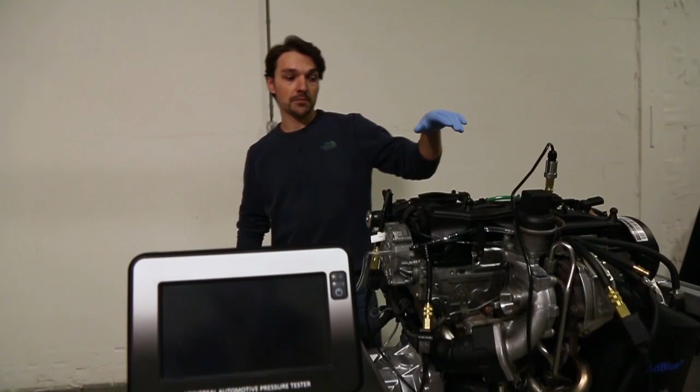All right, everybody, hello. Today we're going to talk about the pressure tester, and more especially how to use it on an engine. In this case, for display purpose, we made this engine rig. And today I'm going to show you how to use the products on this engine rig.

I would like to remind you to have a look at the first video we made because this is the best introduction to the tool. Today, I'm not going to show each and every adapter in the kit. I'm only going to show you how to use it on the engine rig.

I would also like to mention the fact that you have two sensors included in the kit, while on the engine you will see that there are many sensors already mounted. This is only for display purpose. It's much easier to have them already mounted on the engine than having to connect and disconnect everything all the time. And that's it. Let's go to the tests.

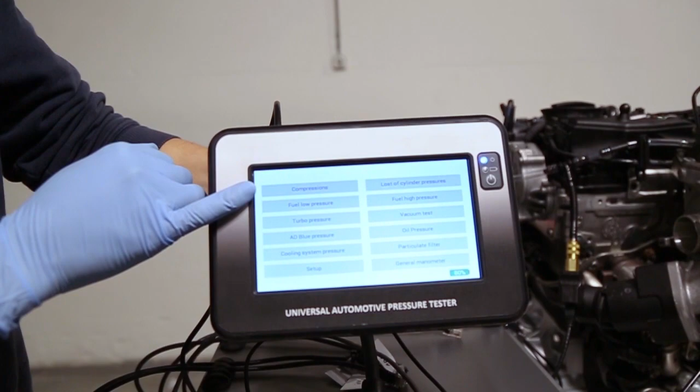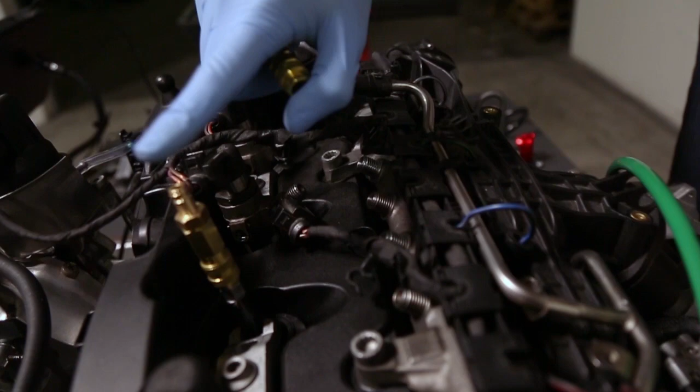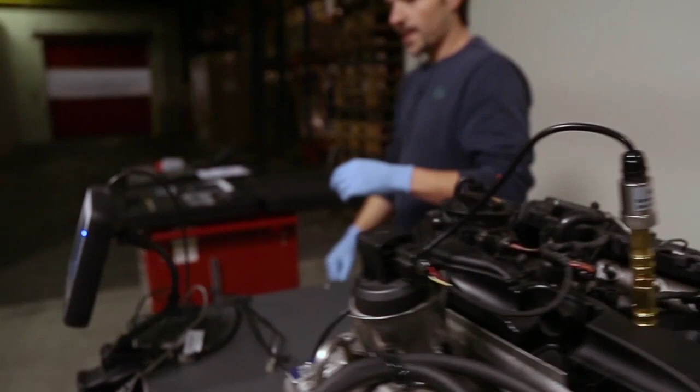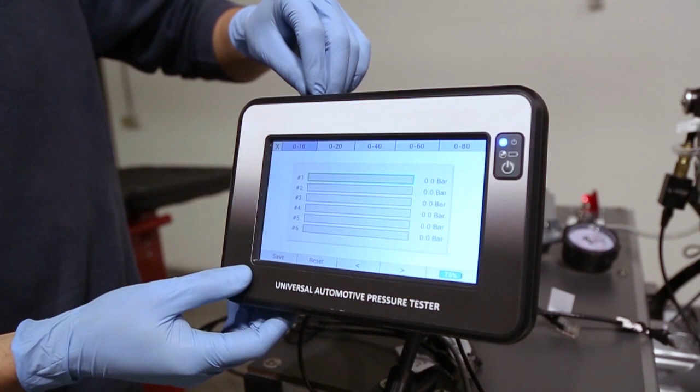Okay, the first test we are going to make is the compression test. To make the compression test, you have to put the false injector here. So we already set it. It's sitting in place of one of the injectors on the cylinder on which you want to take the measurement, of course. And we are going to connect the 0 to 300 bar sensor. So I'm connecting the cable that comes from the sensor. And I can crank the engine.

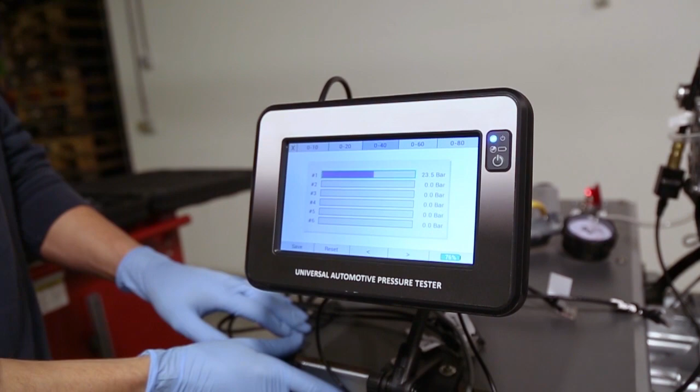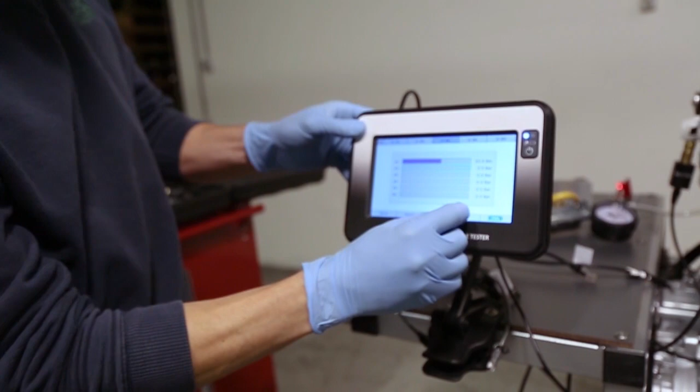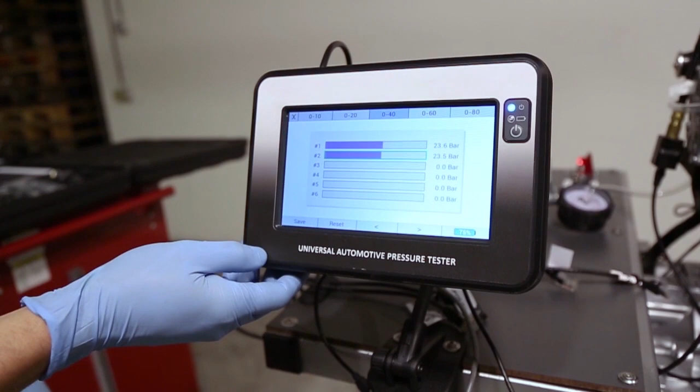If I want to go to the second cylinder, I would have to disconnect it, reconnect it. I'm connecting to the same on the display, of course. Go to the second here, and cranking again. Of course, it gives almost the same value because this is the same cylinder. This was the compression.

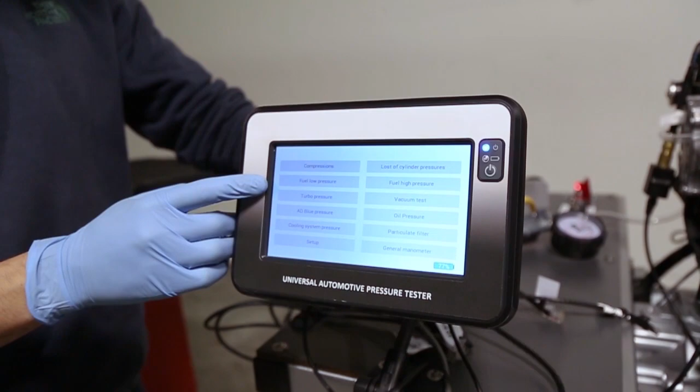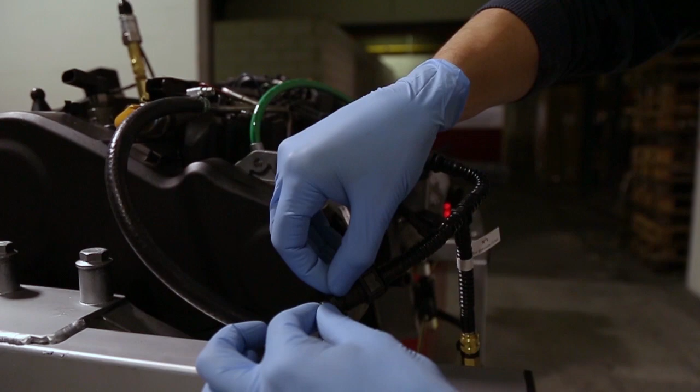The second measurement we're going to make is the fuel low pressure. Okay, here we are already connected with the adapter. So on the engine, on the car, the line would go from here to there. We just disconnected it. We put the T adapter here, which allows us to take the measurements with this sensor, the metal sensor. In this case, this is adapter number 1. It could be another one on other engines.

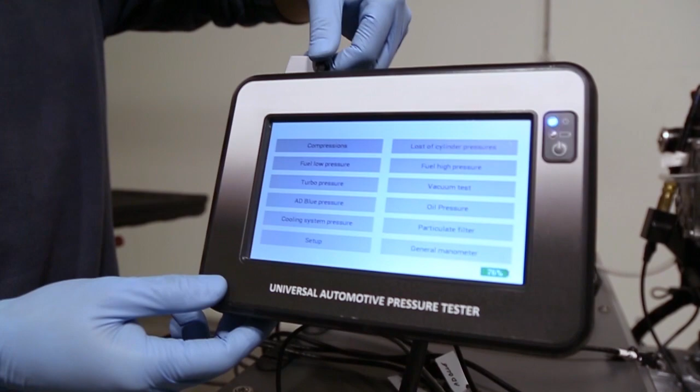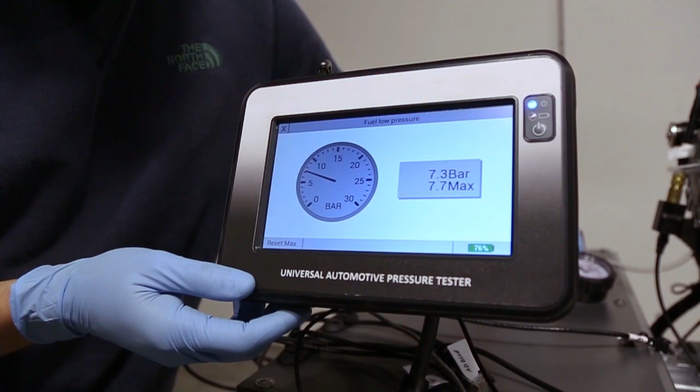I've already connected the right wire, fuel low pressure, okay, and I'm going to activate the pump. It always remembers the maximum value.

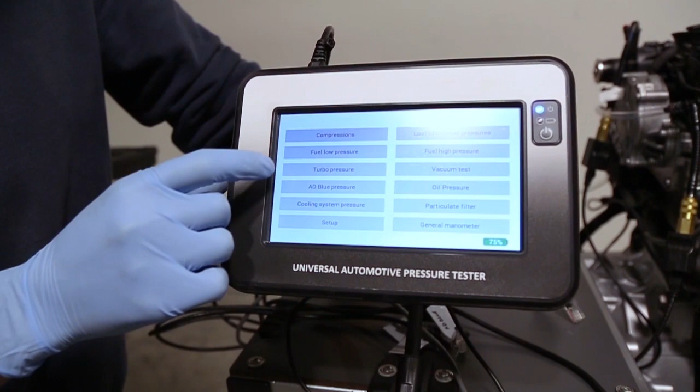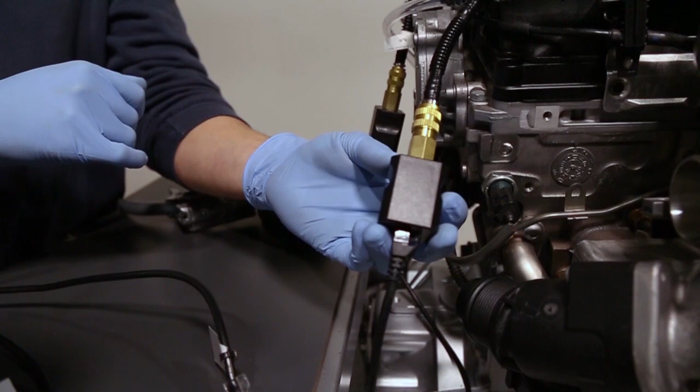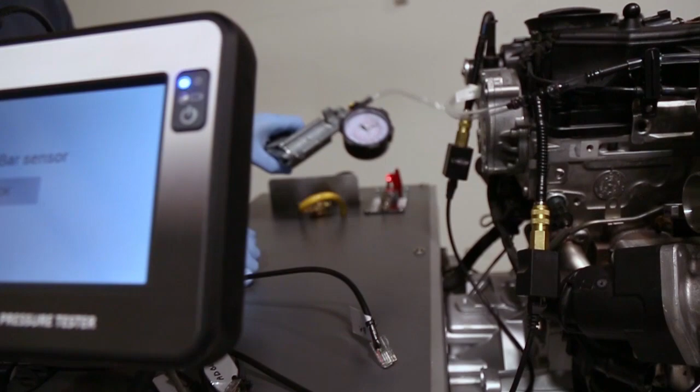The third mode I'm going to show is the turbo pressure. Here, I already connected the right wire. In here, this is this adapter, the plastic adapter, and we are connected to the turbo. Of course, to make the measurement, the engine should be running. So in here, I'm going to simulate that the engine is running using a pump.

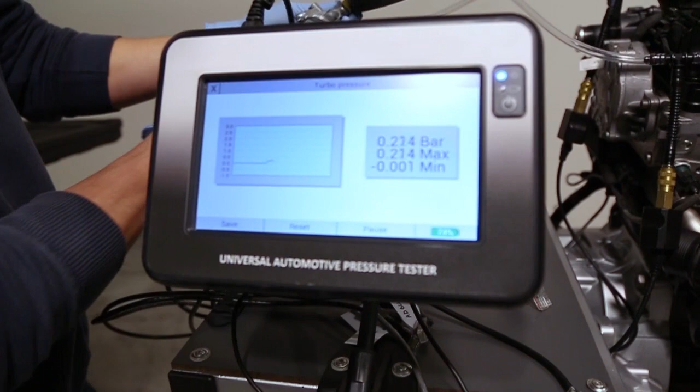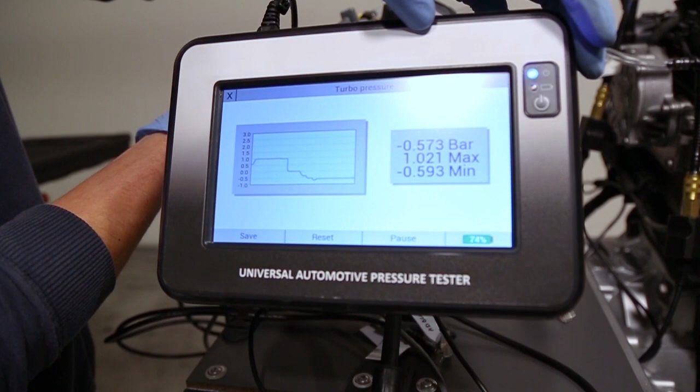So, okay. And here is what you would read if the engine was running. So you have the reading of both the vacuum and the low pressure. And it remembers the lowest and the highest.

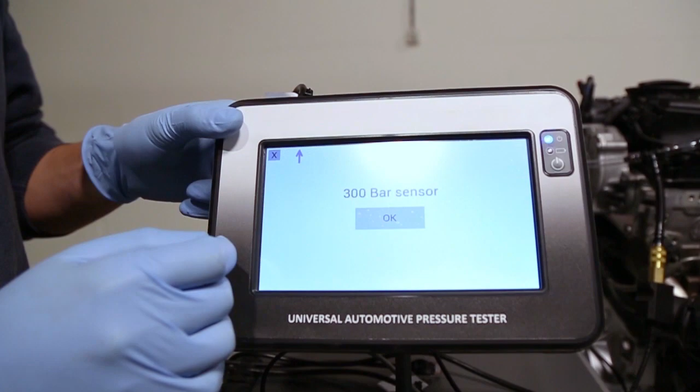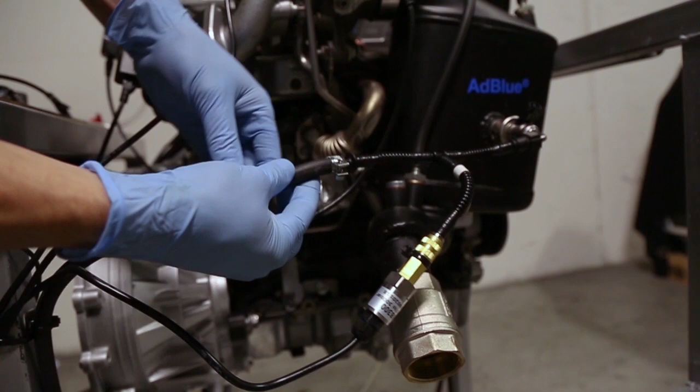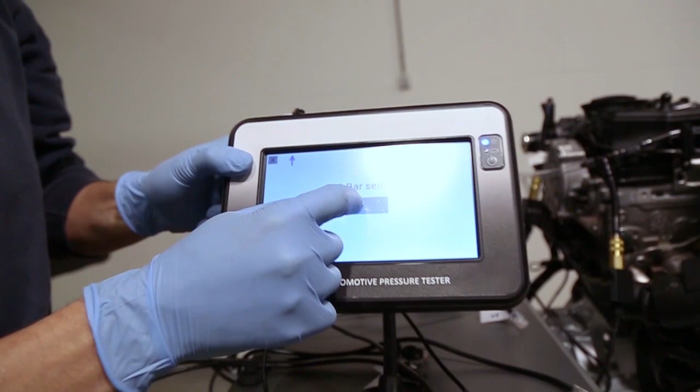Now for the AdBlue pressure. The connector is here. So, just like in the second example, we use one of the T adapters. So the line of the car should go directly there. We removed it and put the T adapter with this sensor. In this case, this is adapter number 3. So this is the line that goes directly to the AdBlue injector on the particulate filter. It's connected. And I'm going to activate the pump.

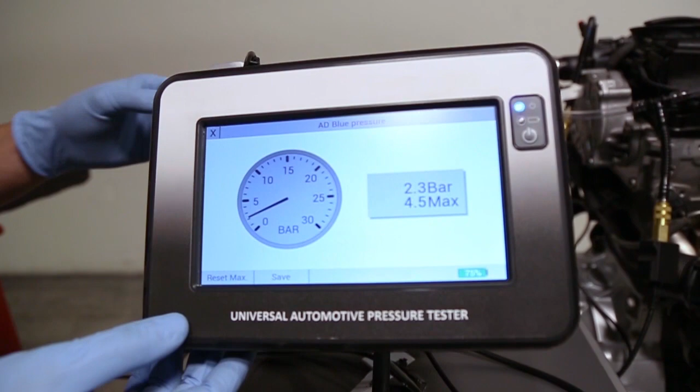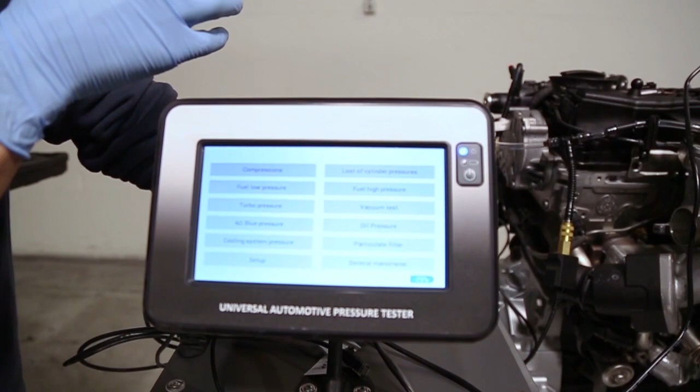For the next test, we have the cooling system pressure. Well, we can't test this on the engine because, of course, this is an engine rig only. We don't have any liquid in the engine. Loss of cylinder pressure: this is an optional set that will be available soon. It's not available right now.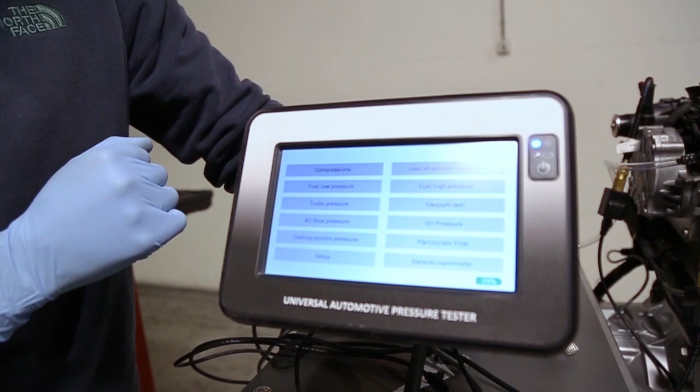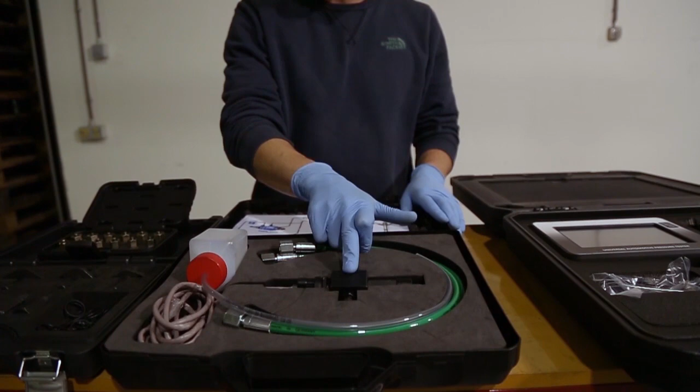So let's go to the common rail pressure, fuel high pressure. I need to explain a bit before we go on the engine rig. So we have 3 optional sets. The first one is the one you will need in any case, the one with the sensor, the 2000 bar sensor, that will allow you to make the measurements with the 2 hoses.

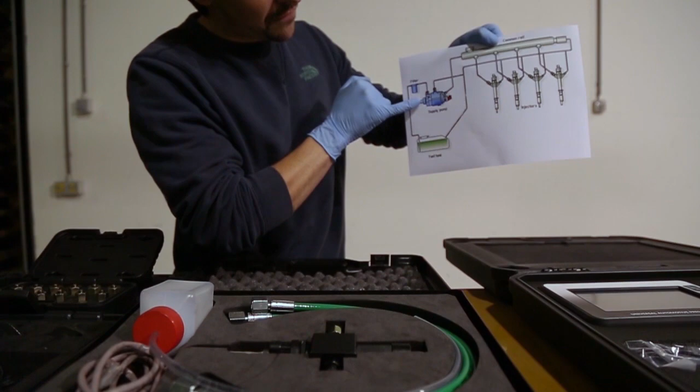So with this, you could disconnect the line that goes from the pump to the common rail. So you remove this line, you connect the hoses with the sensor in the middle to make the measurements.

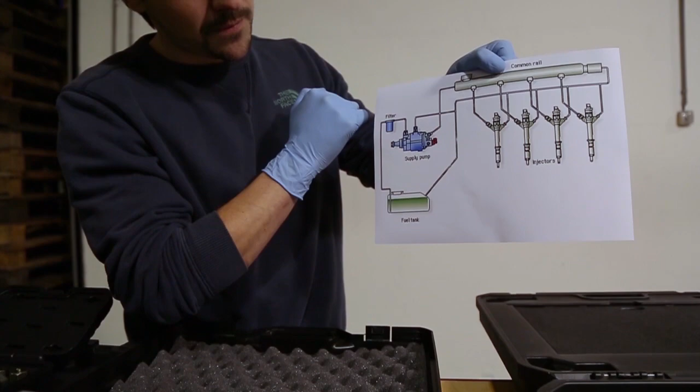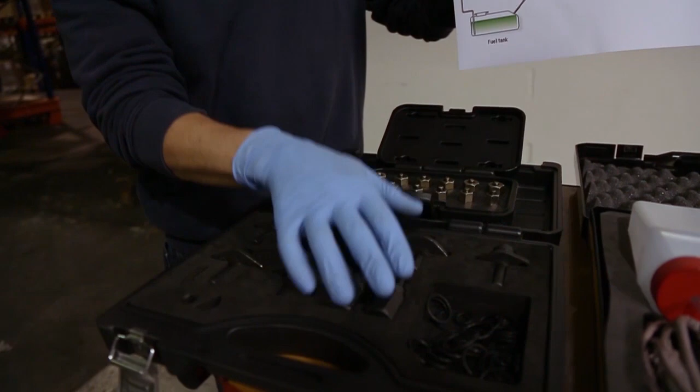You could also measure the pressure from the common rail to one of the injectors the same way. I'm going to come back to this when we go on the engine. With this set and this set, the purpose is to locate an issue on the common rail system. With the first one, it's only a measurement. So, let's begin with this one.

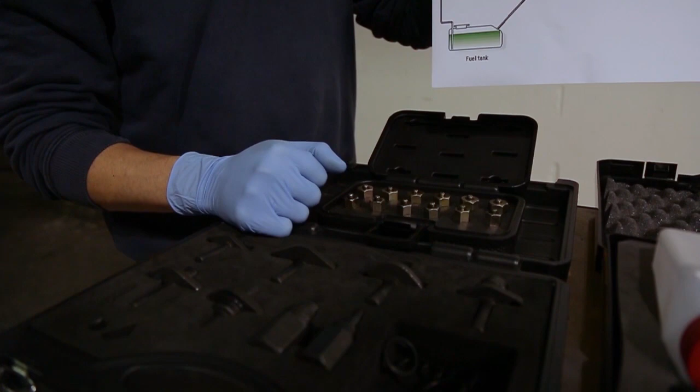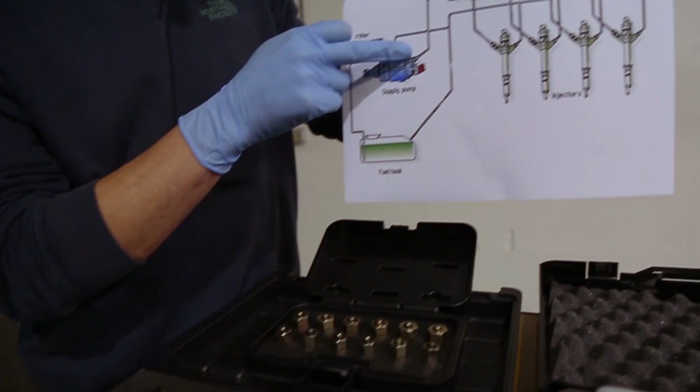This one will help you identify if you have a problem with the regulator on the pump. So, you remove the regulator and you put one of these dummy caps. And with the first one, you take the pressure and you will see if you come back to a normal pressure. That would mean that the regulator has a problem.

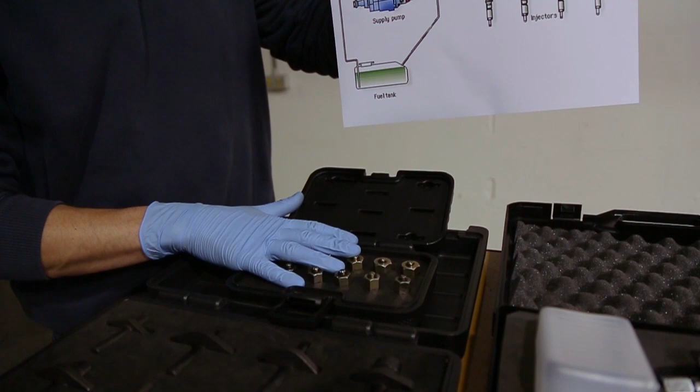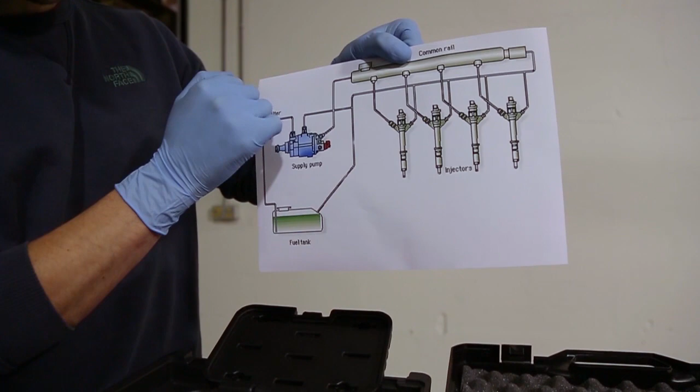The second one here allows you to block these fuel inlets that go from the common rail to the injector. The purpose of this is to locate a faulty injector. Let's remember that the injector might leak from the return line, but they also leak in the combustion chamber. With the previous kits where you collect the fuel that goes on the return line, you cannot, of course, see what's leaking directly into the combustion chamber. With this one, no problem.

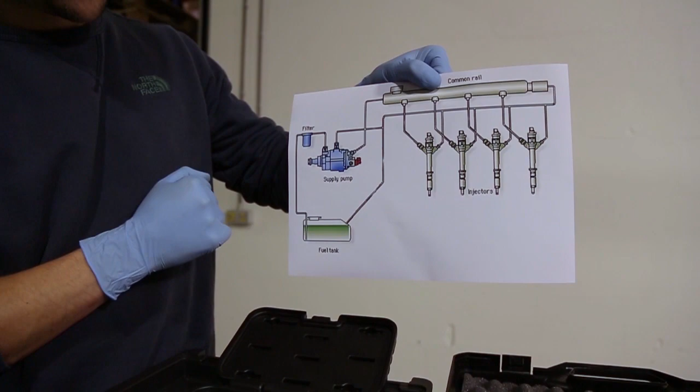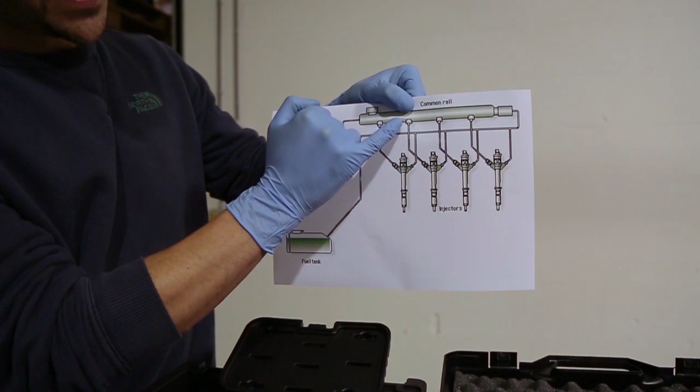So you are connected here with the first kit, the hoses and the sensor. You block, let's say, those 3 injectors, and you let only this one connected, and you go from injector to injector to identify where you lose the pressure. So let's get back on the engine.

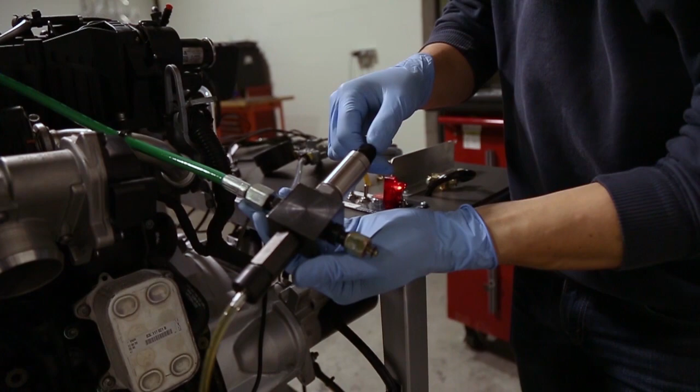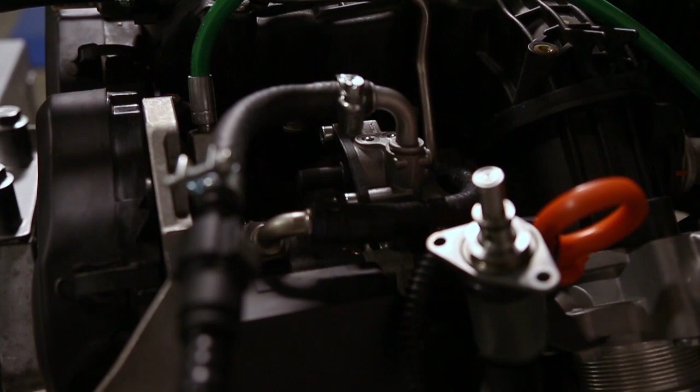Here we are connected on the full pressure of the pump because we mounted the cap in here. The other thing we did is to already mount one of the dummy caps to bypass the regulator here. So the pressure I'm going to have right now is what we call the real pressure, the full pressure of the pump, which should be around 1,300 bars. In this configuration with the cap here, we have the real pressure.

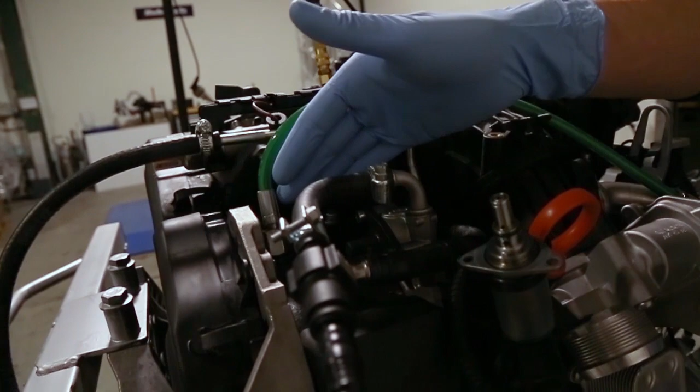Some will say that we are supposed to be reading 1,900 bars of pressure. That might be true, but we have the information from the manufacturers of the pumps, which are Bosch, Delphi, and so on, that if we have 1,300 bars of pressure, we have enough pressure for the common rail. It means that the pump doesn't have a problem.

So in order to have a safety margin with both the sensor and the hose, which are 2,000 bar approved, we have a release valve, which is 1,300 bar. So when the pressure approaches 1,300 bars, the fuel will be redirected here to this small reservoir. In here, of course, the engine will not run because we don't feed the engine with fuel. If we connect the second hose from here to the common rail, we can make the engine run.

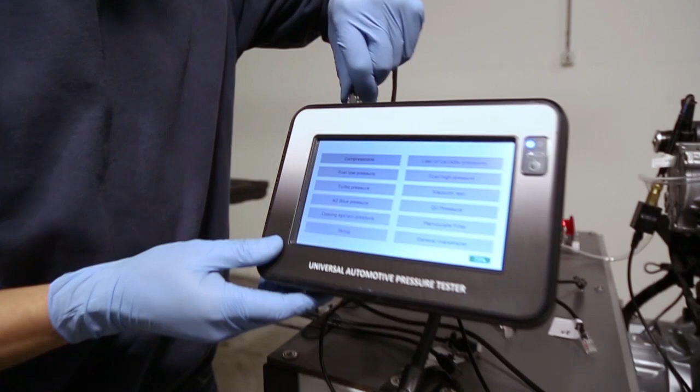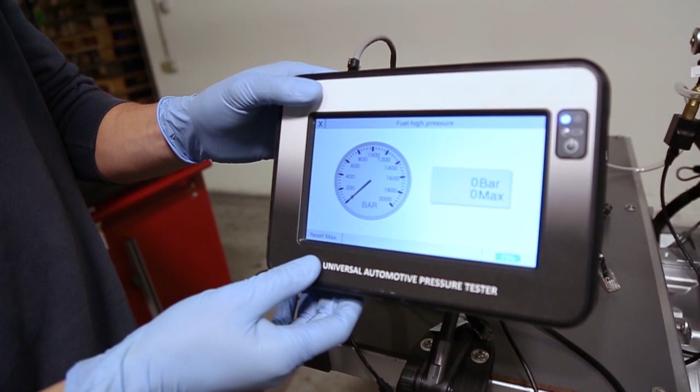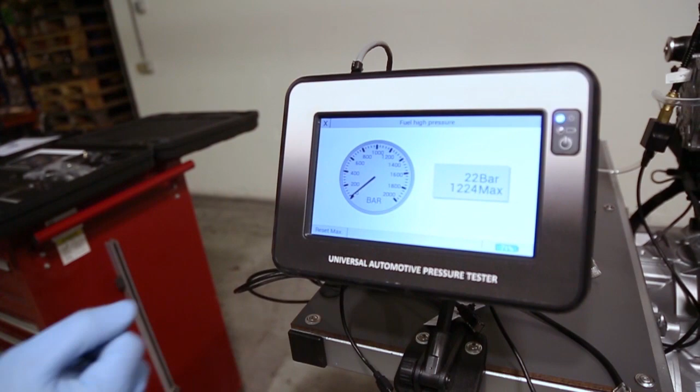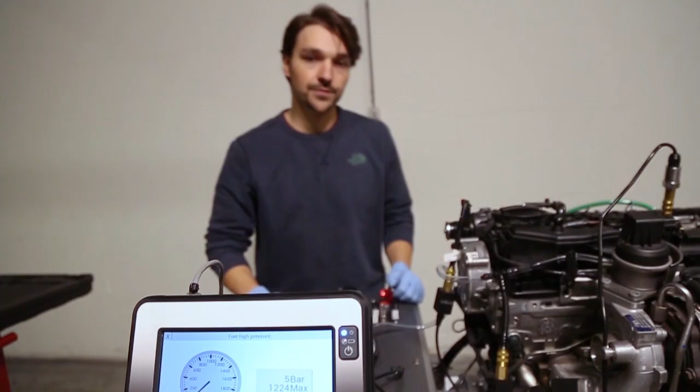So let's go back on the screen. I'm connecting the sensor. Fuel high pressure. And we have, I would say, a normal pressure. If the second hose were connected, you would have a running pressure of around 300 bars. And in case I wasn't clear enough, these 3 sets are for diesel common rail only. The gasoline common rail adapters will come very soon.

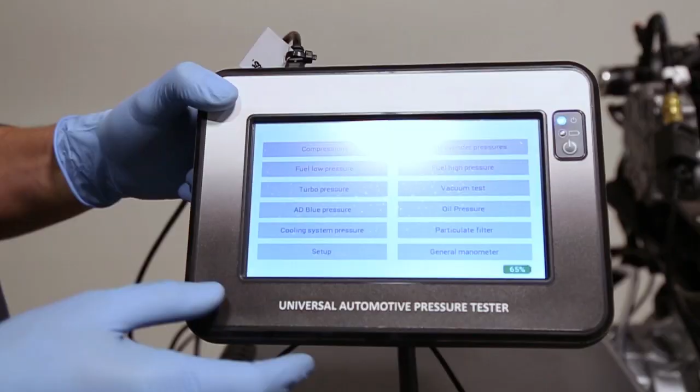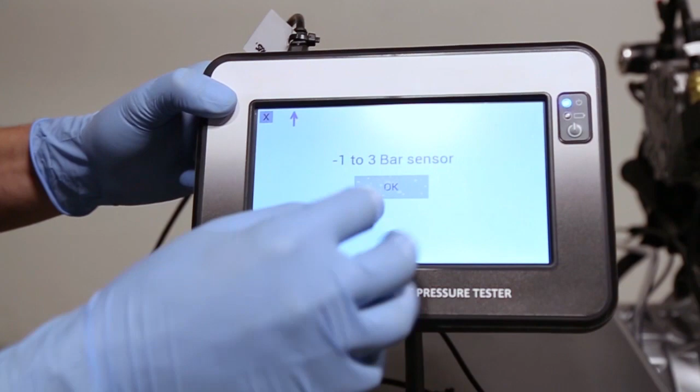Now for the vacuum test, we are going to connect the low pressure sensor, the plastic sensor, and we are connected directly using the adapter number 6 on the vacuum pump. I already connected the right one, and I'm cranking the engine.

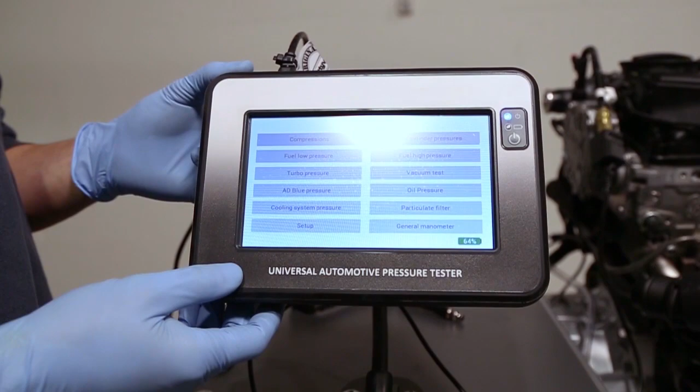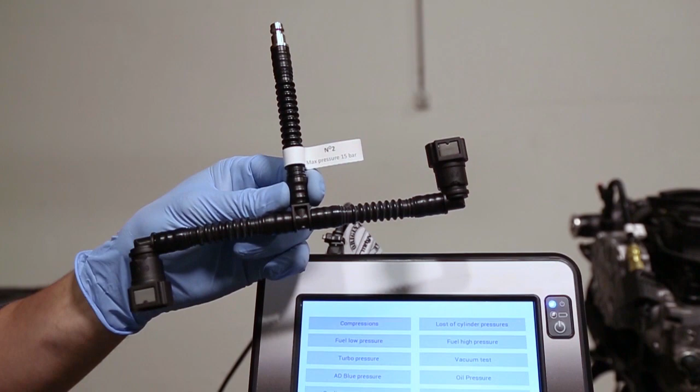Now for the oil pressure, I unfortunately cannot make the test on the engine rig because the engine doesn't have the oil radiator, but we would have to connect this adapter number 2, which is already a 90-degree. Much easier when connecting on the radiator.

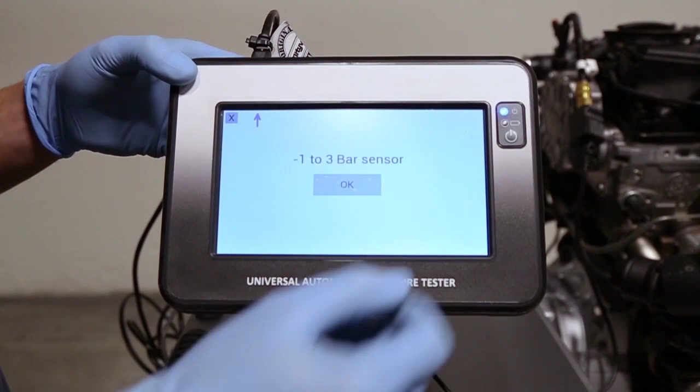And now the last test we are going to make today is the particulate filter. You know that on a car, the car calculates if the particulate filter is blocked using a differential of pressure. For that, there is a hose after the filter and a hose before that go to the differential pressure sensor. In this case, we are going to use the hose before the particulate filter, and we are already connected with the plastic sensor.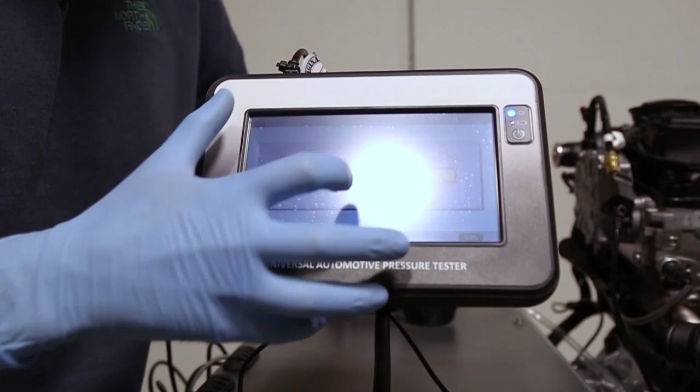So here, I'm simulating a blocked or not blocked particulate filter. The first one I'm going to make is fully open. It's in the green. I'm closing it a bit. Still in the green. A bit more. It's actually closed. And that's it for today.